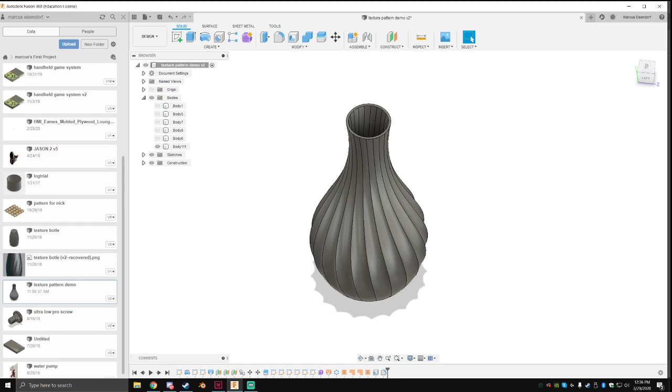Cool, so this is what we're making. It is a thing where you have... how do I explain that? You kind of have a solid surface that gets these cuts that transition into it. So we're going to be learning how to do that in Fusion 360. My voice is a little off because I'm still recovering from oral surgery, so I don't have full control over my mouth right now.

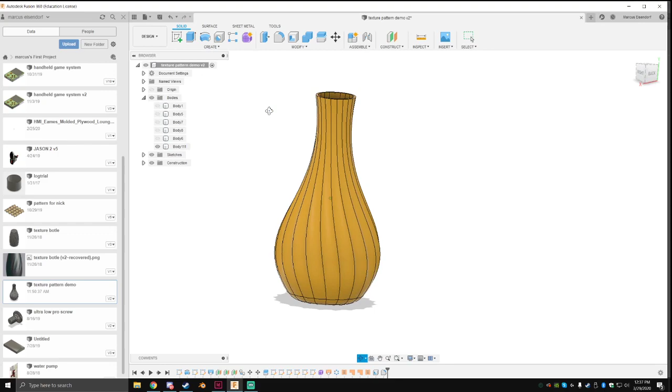Sorry, ladies. Let's start with a blank canvas. Okay.

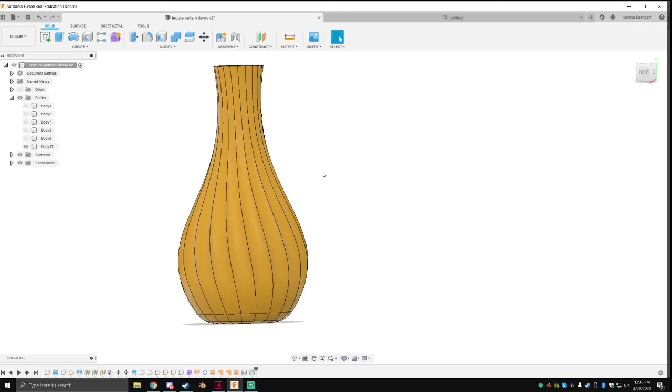Cool, so first thing I'm going to do is create the profile of the form. So you can see with this - often with 3D modeling, first thing you're going to do when creating a cylindrical form, if it's not just a straight cylinder, you're going to draw the profile out. So that's what we're going to do.

So I'm going to start with a sketch. When I start a sketch, I hit R or something to draw a rectangle, and I just select the plane and draw, then select my sketch tool. I'm going to grab my line tool and first draw the base of my form, then draw the center line of it and the top. It's important to draw the center line because that's how your form closes, and it's also the axis that you're going to revolve around.

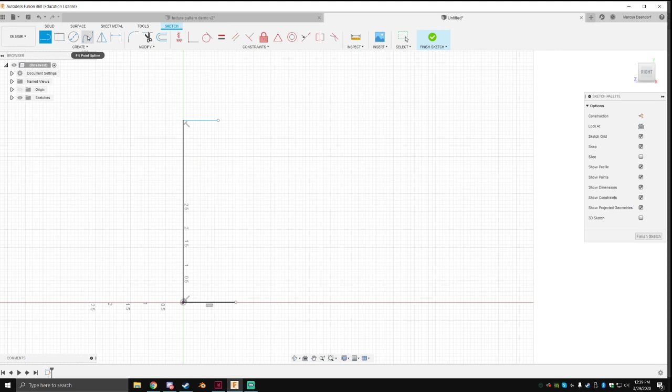Then I'm going to grab this tool up here, which is the fit point spline, to just draw out a nice kind of curved shape. And then you can go in and move these control points around until you create a form that you're happy with.

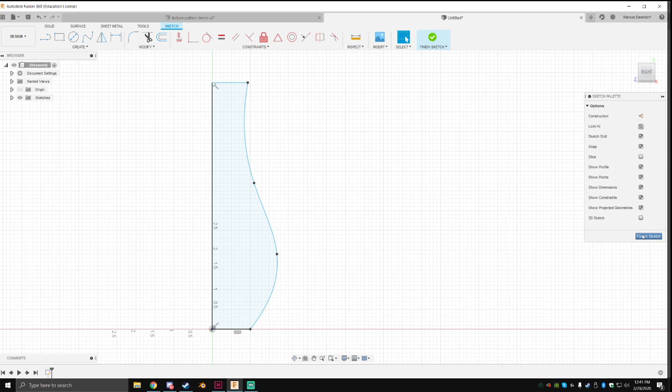Okay sure, I'll go all the way through it at a medium speed, and then we can go back through it and you guys can do it yourselves and ask questions along the way. I'm gonna keep going, so we're gonna finish the sketch on the right hand side there.

Okay cool, so now we have our profile, and I'm gonna use a revolve. Our profile is already selected - if it wasn't, you just select it. Then you select your axis, which is this form here. Creating a new body, 360 degrees, beautiful. So there we go, that is our form that we're going to be playing with.

And if you don't like the form, you can go back down here to your sketch, right click on it, and hit edit sketch. Then we can go back in and move it around a bit and try to create a form that you're happier with.

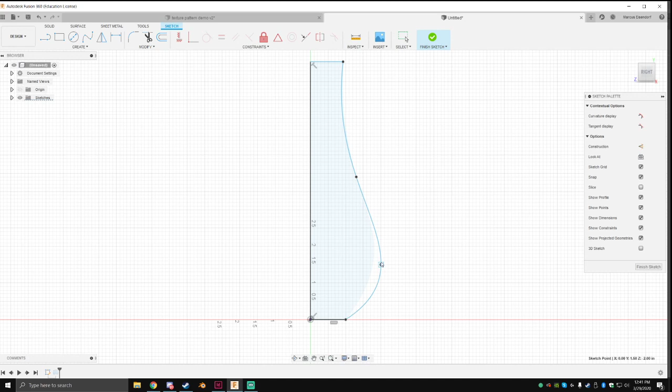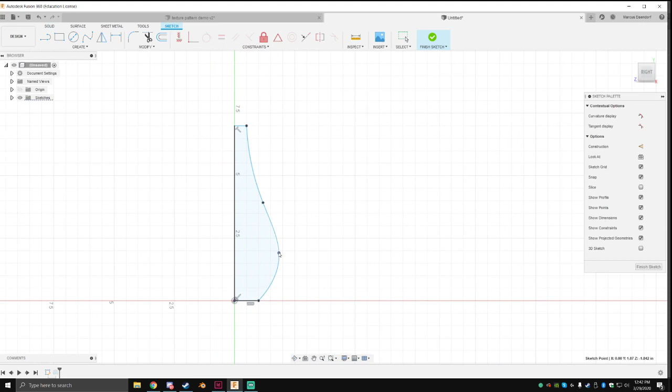That looks alright - actually it looks pretty ugly, I think it needs to be slimmed out a bit. I'm gonna bring this in, something like that, that's a little nicer. Something about the base isn't quite right - if we do like that, screw it, we're not here to make beautiful forms, we're here to learn technique. So that's exactly what we're gonna do.

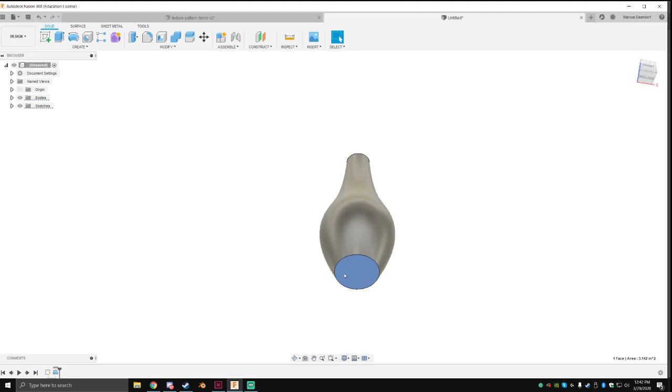So the first thing to do in order to get our sections, that curve - and I'm sure there's plenty of ways to do it, but this is what I figured out - I selected the bottom face here, and I hit C to draw a circle. Now I select that center point, and I make my circle larger than the largest part of my form. There's no specific math here, it's just larger than.

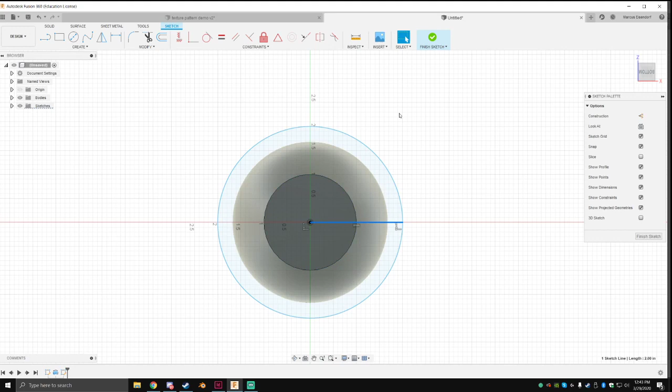Then what I'm gonna do is draw a line - I hit L to grab my line tool, and I'm drawing it from the center to the edge. Now I hit escape to get rid of the tool. I'm gonna select my line here and go up to create circular pattern. With my line selected, I select the center point here as my center point. Now you can see that we have a pattern happening - you can move this around to increase it. The type is full, which means it'll divide however many pieces you want evenly.

And I'm going to do 20. Okay? So what this is defining right now is the thickness of those sections, how thick each of these sections is. So I'm going to finish the sketch.

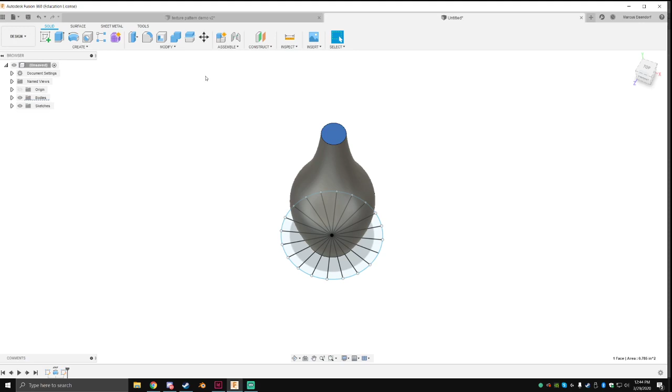And there we go. All right. What we're going to do now is select the top plane, and I'm going to hit P for project. All of these shortcuts you can also just find them in here somewhere. I don't know, project is somewhere in there. I hit P for project.

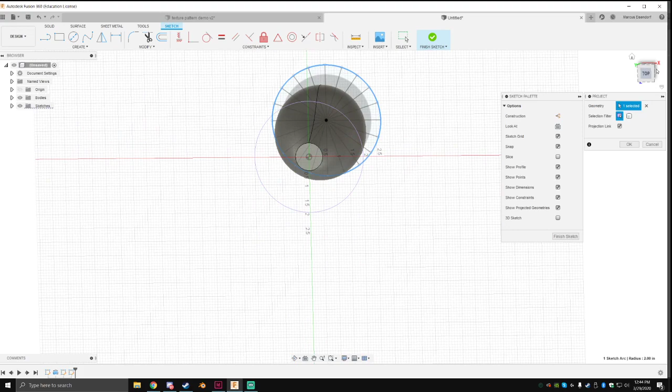And I'm going to project the circle, which means I'm going to take the circle from the bottom and project it, meaning create a copy of it at the new plane I'm working on. I'm also going to grab a couple of these lines and project them as well, doing a few so we have some options, because what I'm about to do next you'll understand. So here we go, we have the thing at the bottom, the thing at the top, fully enclosing our form here.

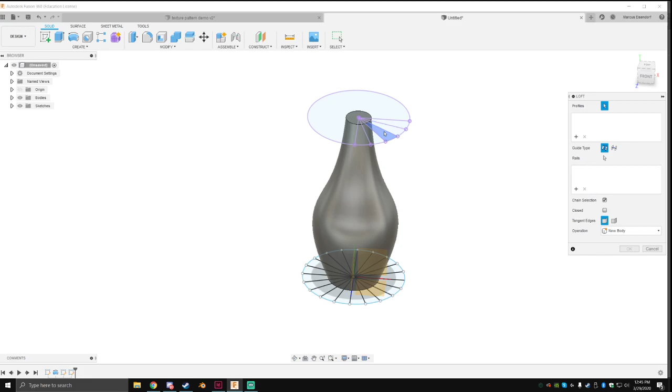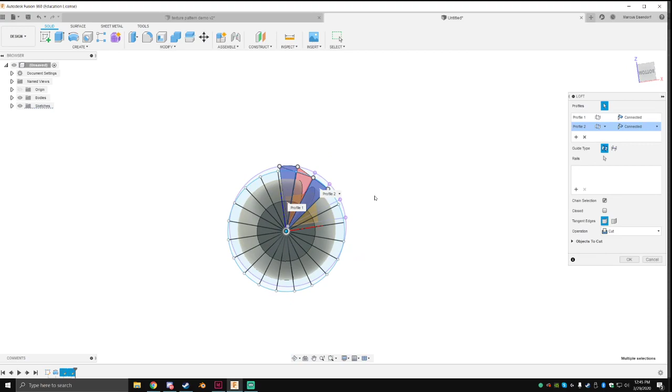And we're going to create a loft. What the loft will do is we select a section, one of these little pie slices from the top, making sure you select not just the outer portion of it but the inner portion as well. Then we select a pie slice from the bottom, and not the one directly under it unless you want a straight kind of sweep, but one of the ones off to the side. What you'll see is we now have this cut that kind of arcs through our form. So we hit OK.

You can see what that did. Okay? And this is the basis of the whole operation.

All right. Any questions so far? You guys doing good? All right.

So over on our left-hand side here, I'm going to open up our bodies panel. We have our body one, and we're gonna make— Tag, you have a question?

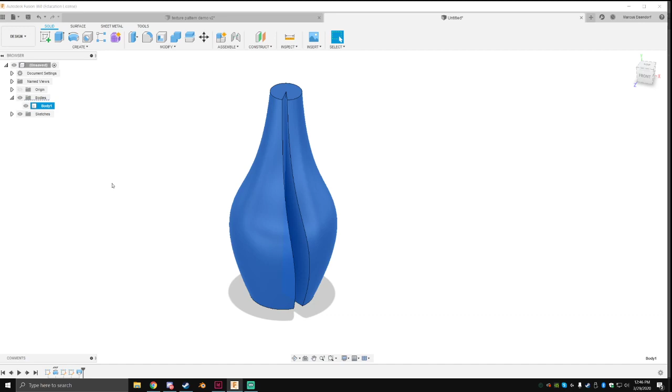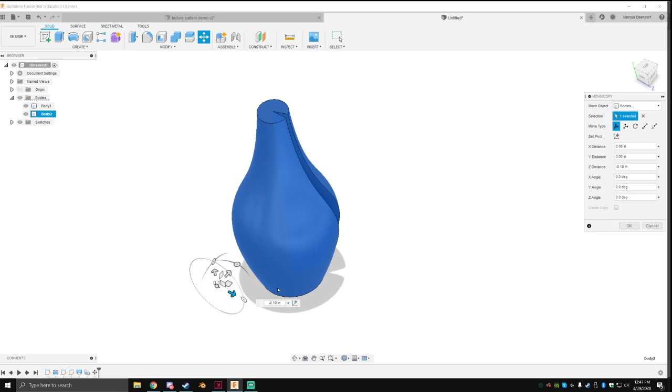Okay. We're going to make a copy of this. It's very important that we have a copy of it. So I'm going to hit M for move and copy, hit create copy. This is probably the most terrible way to make a copy of something, but you have to move it for it to create a copy, so I move it a little bit and then move it back. All right, so now we have two of the same exact thing here.

We have two because one of them we're going to cut up. So I'm going to hide the first one here. Okay, so now we're just working with this one body, and we're going to start cutting it up. We'll do that using planes, offset planes.

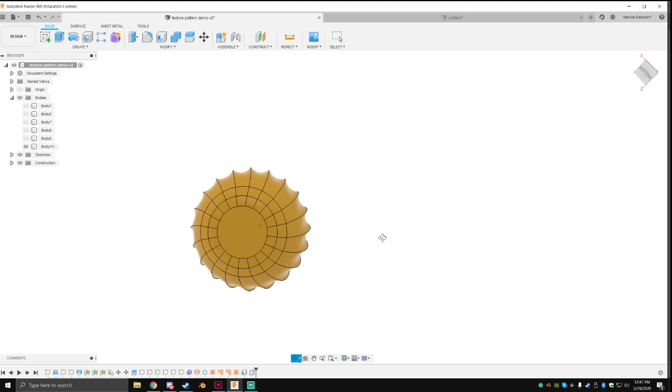So up here under construct, we're going to hit offset plane. First we're going to select the bottom of our piece. This first plane is going to define where we want these to stop, where we want to stop doing indenting and go back to being a straight circle. Okay, so, or where it starts, whatever.

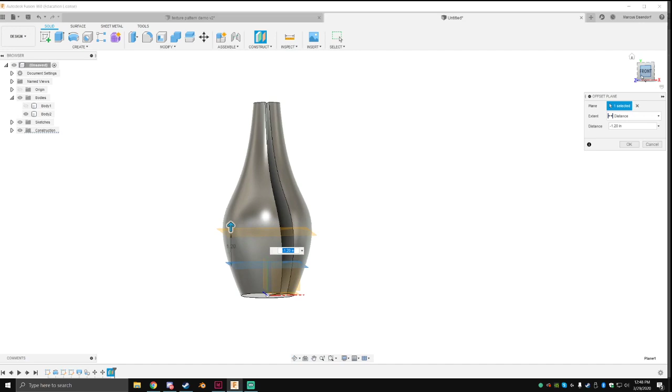I'm going to create another offset plane from this one, and this is what I like to consider the major indent, like where we want the most indented portion to be. On this one, I have that right in the middle of the bulge, where it's the most indented. So that's where this is, kind of right in the middle of the bulge.

We're going to create another plane, and this one's going to define where we want the texturing to stop. Okay, so now we have our three planes, and these define basically the entire area that our texture is going to live in. So now we're going to use these planes to cut our body.

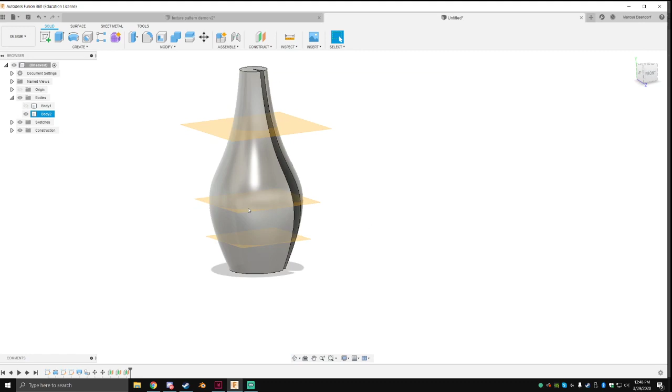We're going to do that by going up into modify, split body, and we select first our body split, which is this. Our splitting tools are our three planes, so 1, 2, 3.

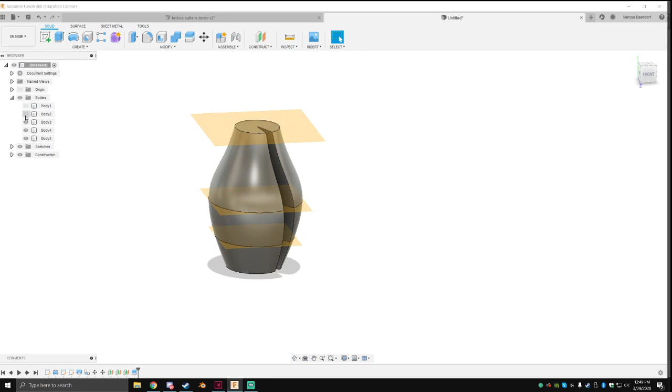Great. So now our body has been split into multiple sections, and I like to just organize these so that they're in order. So there's 1, there's 2, so we're going to drag this up so that we have boom, boom, 3, 4, beautiful, and then our whole body section there.

And I'm going to hide all of our construction lines because we don't really need those anymore. Okay, so now here's our split body.

Okay, everybody following along so far?

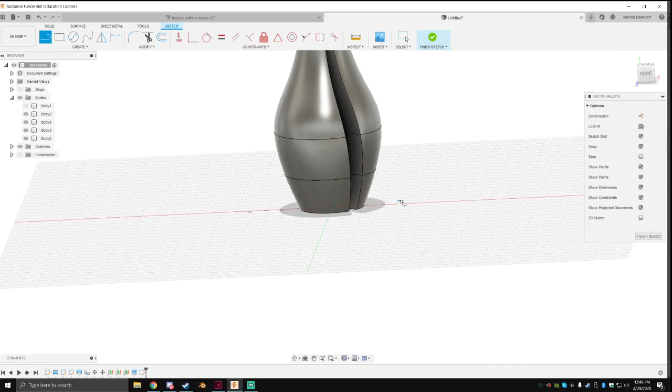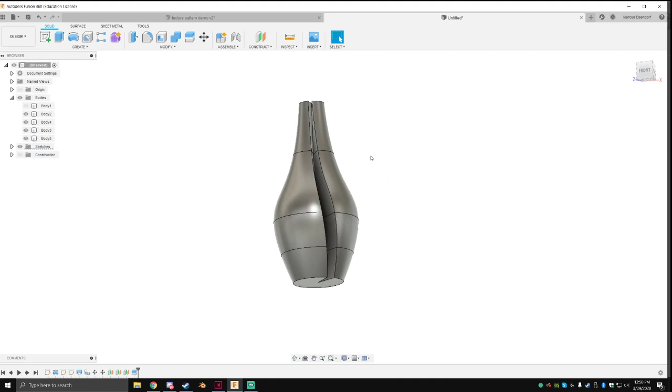So now what we have to do is within these cut sections, we're going to define what the profile of our pattern is going to look like. You can do anything for this profile. We're doing just a simple indent for the demo, but you can do whatever you want at home with your computer. So first we're going to start at the bottom. I hid all these other ones so it's easier to see what I'm working on.

I'm going to hit C to draw a circle, and I'm going to draw a construction circle. I check construction over there from the center point to the edge, and it just locks right on. Okay, so now we have a circle there.

At the bottom, it is a circle. There's no indenting at the bottom because the idea is that it transitions. So we're actually going to make that not a construction circle. What I'm going to do is just draw some lines to basically define this pie shape. I'm going to turn off construction. One line there, one line there. Our shape is defined.

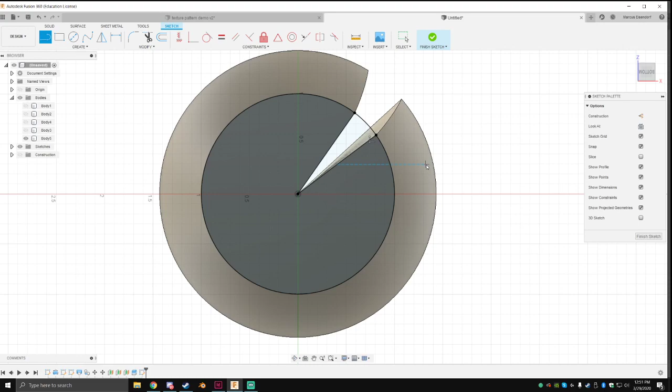I'm going to hit T to open up my trimming tool. I'm just going to trim away all that extra stuff that we don't need. Okay, so now you can see that we have our first little pie shape defined.

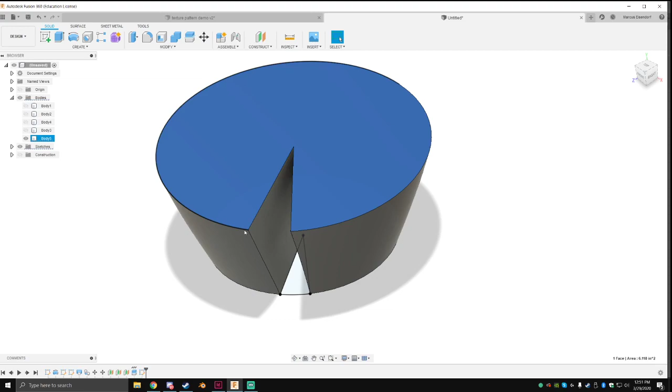We're going to do the exact same thing here, because as part of our transition, we want it to go back to being just a normal cylinder at the bottom. So I'm going to hit C to draw my circle, lock it onto the corner there, hit L to grab my line tool, and just define, again, my pie shape.

Hit T, okay, it's acting weird. I think that's fine. Actually, it's not fine. We are going to delete that because it's acting weird. Instead, we're going to just use a center point arc. We start with the center point arc at the center, and then we go corner to corner. Now we have a nice defined pie shape.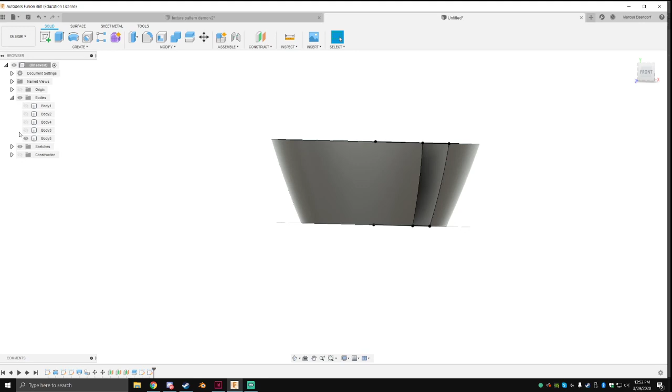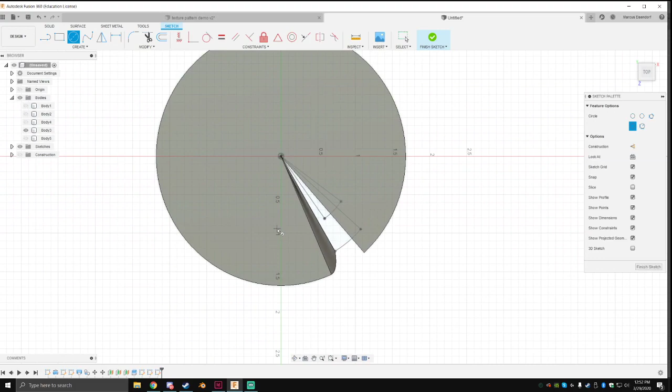Great. Let's do the next section, which is this part here. This is where our form starts to take shape, so it's going to be a little bit different. I'm going to go into sketching mode. Because I want a symmetrical indent, the way I'm going to do that is I draw with construction lines. I hit L for line tool, and then I check construction. You can also hit X to open up construction mode.

I'm going to draw a line from this corner to this corner. Then I'm going to draw a line from the center through the midpoint, and it will just lock onto there for you. If it doesn't lock on, which it will, you can always use relations. So if you select first your center line here and then the crossbeam, you can just hit perpendicular, and it will throw it right there in the center for you.

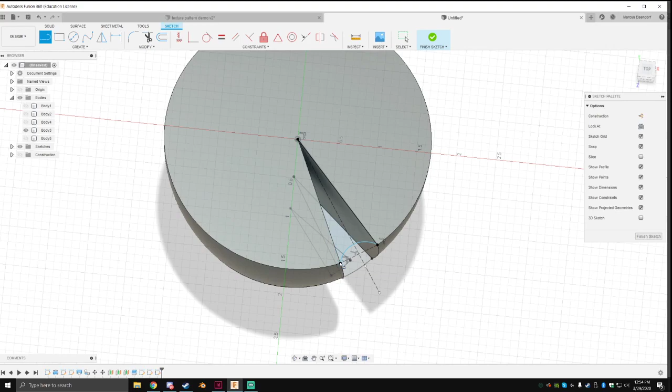So now that we have that center line defined, we're going to draw an arc. I'm going to use a 3-point arc. A 3-point arc works by selecting first one corner, then the other corner, and then you get to define where it goes. I'm just going to turn off construction, and basically create as much of an indent as I want to see there. Then I'm going to finish it off with some lines to define our pie shape—it's actually unnecessary, I just like to do it. There we go. So now we have our 3 shapes right here that are transitioning from cylindrical to indented.

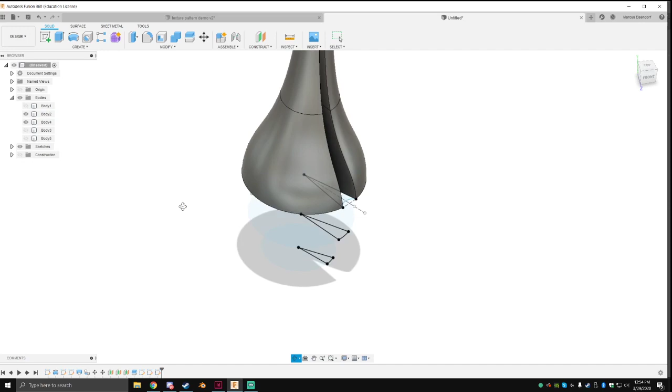So let's open up our next body. Now, in this upper section here is where we want it to go from being indented to being cylindrical again. We're going to grab our shape here and do the same thing that we did on the other ones, which is start by drawing our lines to define our pie shape. Then I'm going to go and create a center point arc, selecting the middle, and then our 2 sections there. Beautiful.

Finish sketch. Okay, and then we have our final shape here at the top. I'm going to draw a circle, and then I'm going to draw our lines, 1, 2, and I'm going to trim away the rest of the circle. Great.

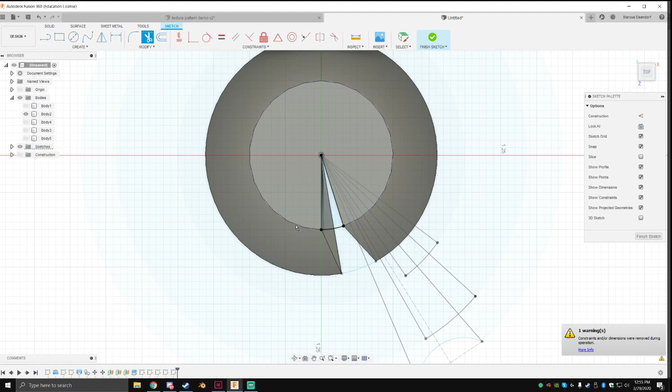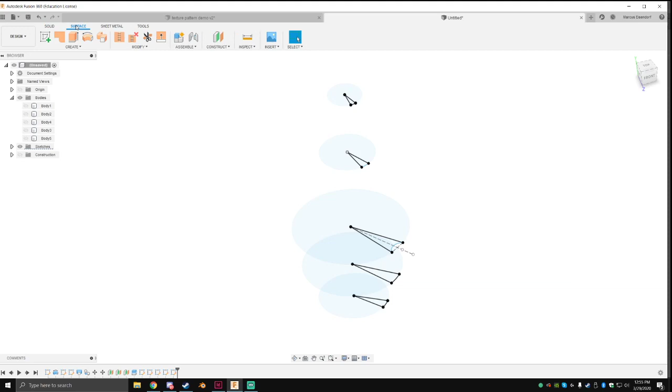So now you have the basis for what we're going to do. This is where it gets fun. What we're going to do is go up here on the top to surface mode. I'm going to create a loft. We're going to loft from all of our little sections here.

Now we have a surface that is one little quadrant of the form that we initially created. But there's one more step, and you'll see if we open up our whole body that the form doesn't quite align to the edges. Things are a little off.

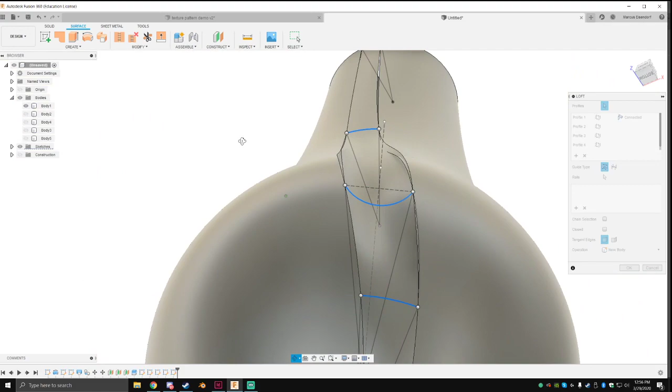See that? To fix that, we're going to add rails, and that's what this body is for. We're going to select one rail on this edge and a rail on this edge. Now our surface perfectly fits in that 1/20th section of our whole cylinder. So we hit OK to create that new body.

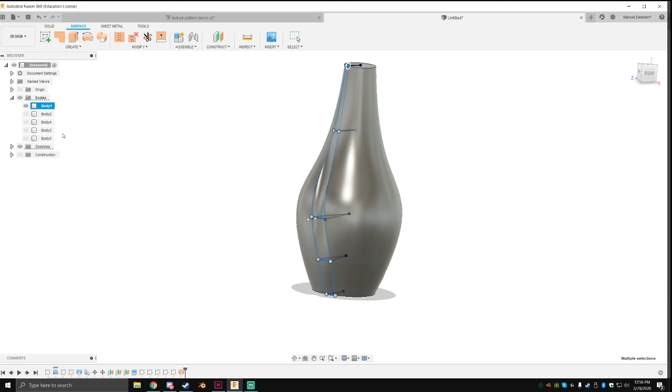And now we have a surface body. We can hide this, and there is our surface.

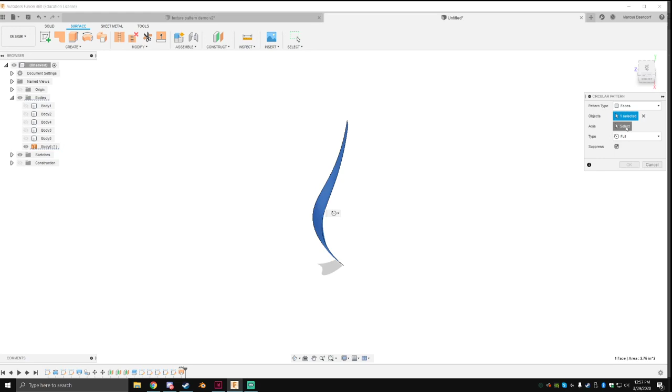So now, to turn this into the whole thing, all we have to do is go into Create, Pattern, Circular Pattern, and select our objects. Then in Axis, we select our center axis. Remember that we cut it up into 20 pieces, so we're going to put in 20 and hit OK. And there you have it.

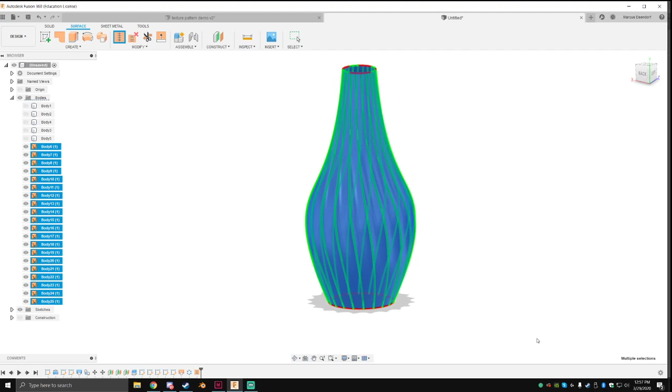That is pretty much it, but let's wrap it all up, because right now we have 20 different surface bodies. So we're going to go into Stitch and select the whole thing. You can see these green lines are saying that all of those edges can be stitched together. It's red around the bottom and top because it can't stitch that whole circle together, but we'll do that. Hit OK. Now you'll see that all those 20 bodies turned into one surface.

And then we're going to go into Patch. We're going to patch the bottom. Beautiful. And we're going to patch the top. So now you'll see that we have these three surfaces: the body, the bottom, and the top.

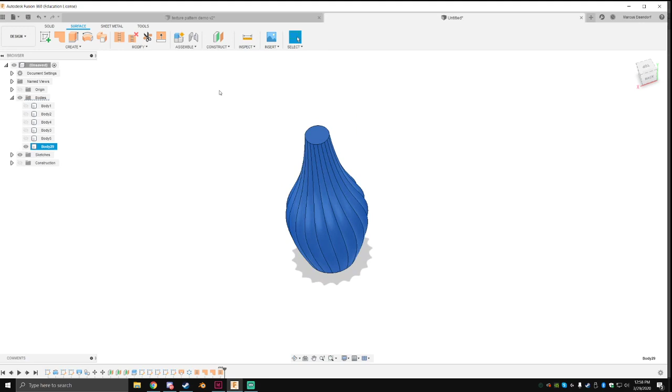And you go stitch one more time and stitch the whole thing together. When you stitch a closed shape together, you create a solid body. You can see if we go into Inspect and Section Analysis that it's all full, a whole solid form, which is exactly what we want.

Now I'll go back into solid mode. This is where you get to do whatever you want with your body now. So if you want, you can hit F to grab your fillet tool, or just select it up there. You can select the bottom face, add a fillet to it.

Things take longer now to load because this is kind of an intense form. So you can fillet up the base and the top, whatever you want.

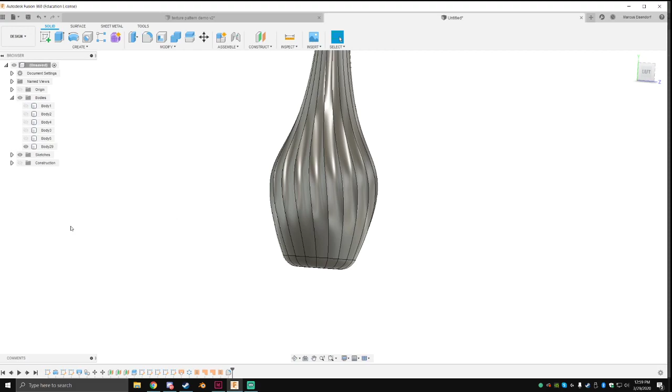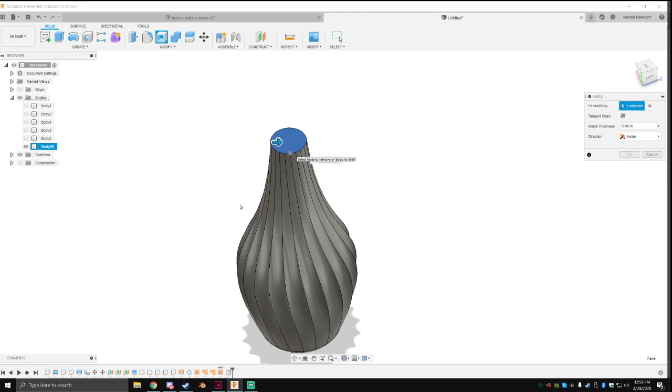And now we can go over here. You can go into Modify, Shell, or it's just right here. And you select that base, 0.01. It just needs to load for a second. Let's see what it comes up with. There you go. Now you have a shelled body.

It's a little bit thin. Let's go 0.05. Let it load. Beautiful.

All right, so that's pretty much it. Very quick and easy, once you know how to do it.

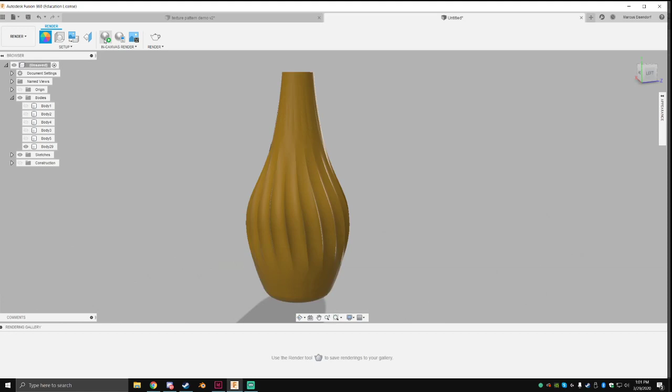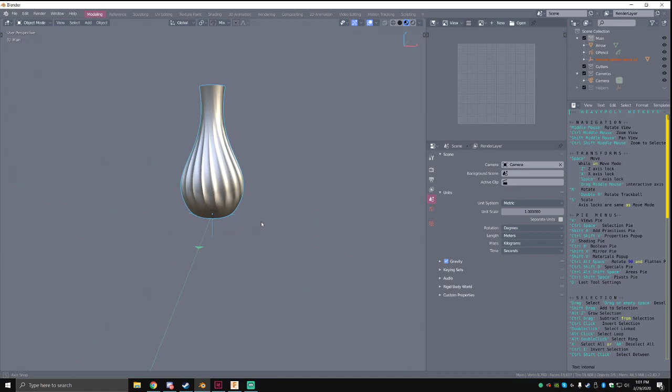Okay, and this is one I made earlier. It's not the one that we just did, but that's neither here nor there.

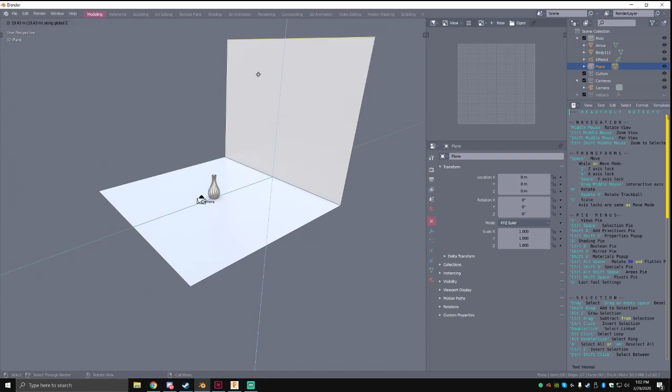So I'm going to create a plane, because I'm going to create a seamless backdrop for our file here. I'm going to grab our edge here, and I'm going to go quick in here because there's a lot to learn in Blender, and I'm not going to be able to teach it to you in a few minutes. Shade that smooth, shade that smooth.

Okay, we're going to create a new camera and set up a shot, and I'm going to change our distance to 90. Great. I'm going to adjust our material here. Okay. And we're going to lock down our camera. Great, so we have our seamless, our camera.

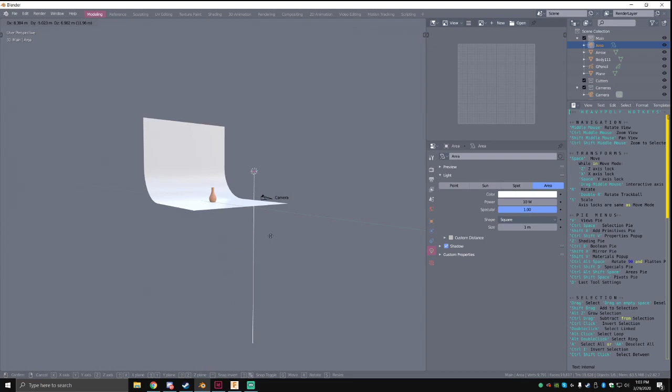Let's get some lighting set up. I'm just going to do a simple light setup, something to maybe mimic having an open, like a large window off to the side, just to get some nice kind of soft lighting from a big window. We're going to go to rendered mode. Let's up this to 2000. Okay, soft shadows. Beautiful. Let's add a material to our backdrop.

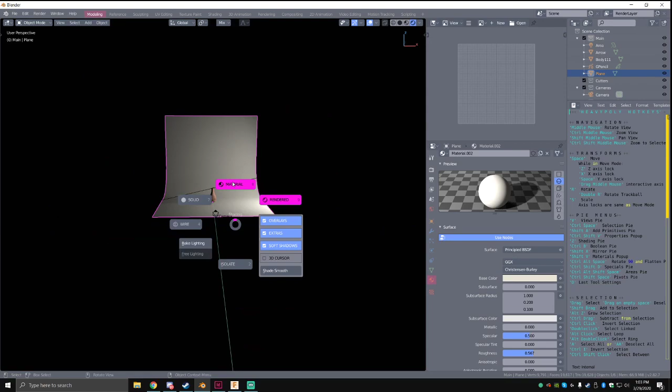Let's make it nice and soft, I like soft. Maybe it's like a kind of ivory paper going on. And maybe we want a light adding some, just some highlights on the edge of our body here, so you get some edge lighting, rim lighting.

Let's see, something like that, just so you light up some of those edges. Cycles, let's see how this looks. Yeah, we have something going on here.

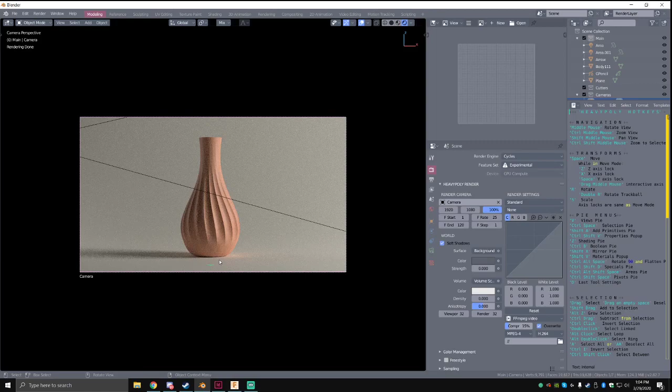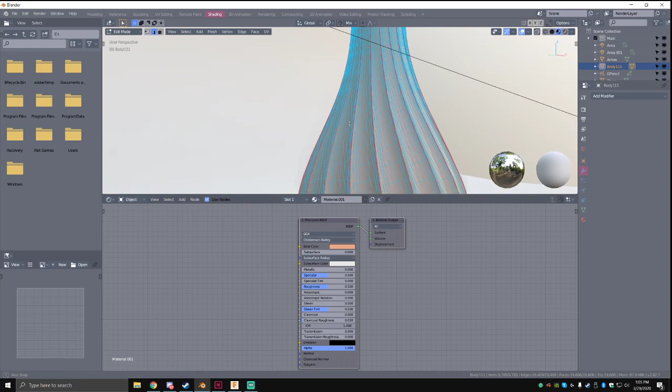Now, one thing about bringing meshes from Fusion into Blender is that you're switching. They import kind of weird because Blender is mesh modeling, so you can't really do as much with the mesh as you'd maybe like to. When it comes to texturing, you can even see the model's a little weird. If we open up what this mesh looks like, it's a little messy. You would never model like this in Blender. But that's all right.

So one thing we're going to do is try and add some texture to it. Maybe give it some sort of a powder coated look. That's kind of cool. Not what we're doing, but it's kind of cool.

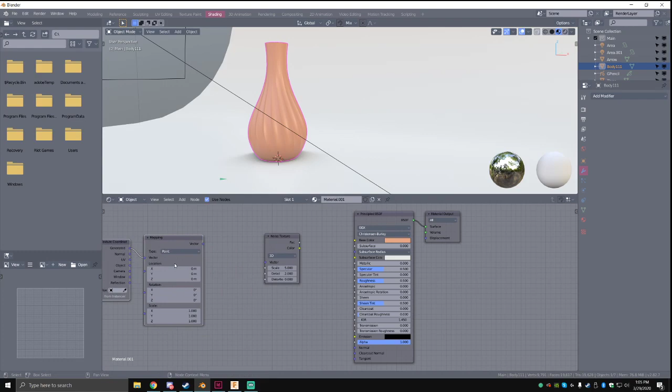So we're going to add a noise texture. Let's see what that'll do. Beautiful, scale that so it's really fine. What I'm going to use the noise texture for is creating that kind of bumpy look of powder coated.

So I'm going to use a color ramp. Can you smooth the mesh in 360?

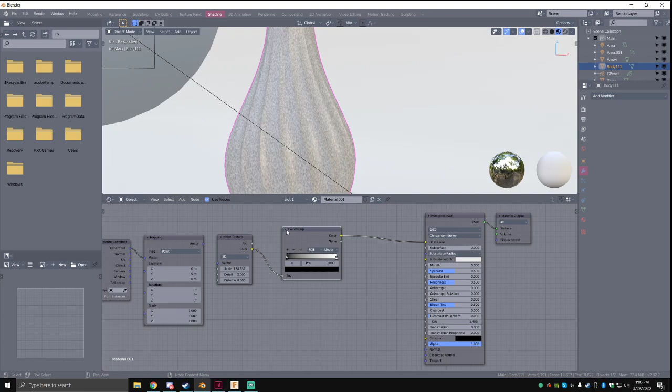Not really. It really sucks bringing stuff from Fusion into Blender, and that's just a fact. Really, you can go from Fusion to KeyShot, or just model straight in Blender, is really the best way to do things, if you want my opinion.

So I'm using this color ramp to switch it to just black and white. Let's up that grain some. Okay, I'm putting it into the base color just so I can see what's happening, it's easier to edit. But really we're going to turn this into some surface imperfection.

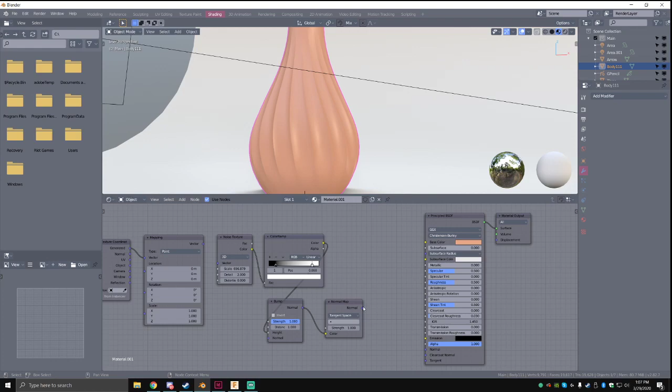Great, so now I'm going to add, what do we want to do? Let's bring in a normal map and a bump. Take that out of our color. I'm going to go into the height here and bring that normal into the color there, bring that into our normal. Let's see if that does what we want to do. Sick.

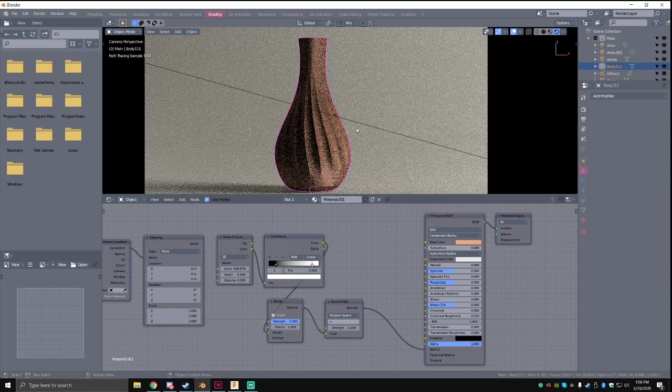Don't you love when stuff works? But it's still looking maybe a little bit too intense. Let's look at our camera, rendered. Yeah, it's looking a little whack, not gonna lie.

So I think our bump is probably a little bit too high, so let's just tone that down some. Oh yeah, we are in business. I think we got something.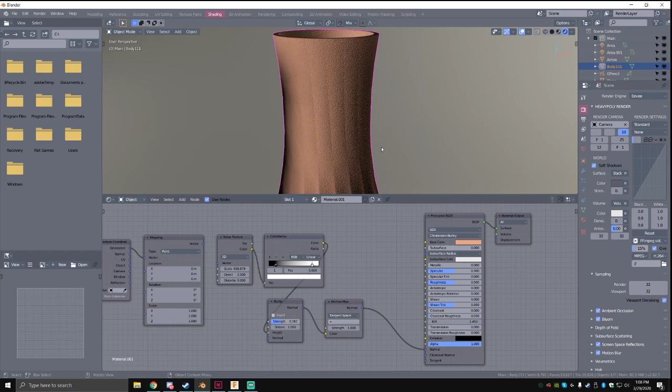I wonder if they'll let us clean that edge up. No, I don't think so. Oh well. Okay, cool.

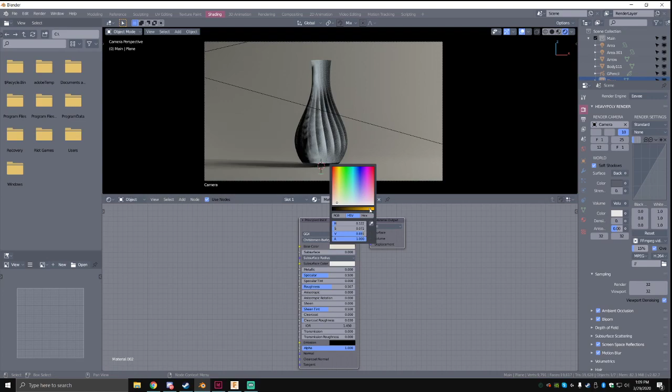So then what I'll do is, what color do we want it? I kind of like maybe a light blue. Let's go a little bit more saturation. Okay, snap into our lamp. Nope, that looks good. Cycles, cool.

Render, turn that up to maybe 64 samples. And let's see. Here's, yeah, I can do maybe 75%, maybe we'll do 50%, just so you guys can see some output here. And sorry, I'm just clicking around right now, I'm not telling you guys what's going on, I'm just getting a render set up.

256, 256, okay. So now I'm gonna go render this image out, let's see what we get.

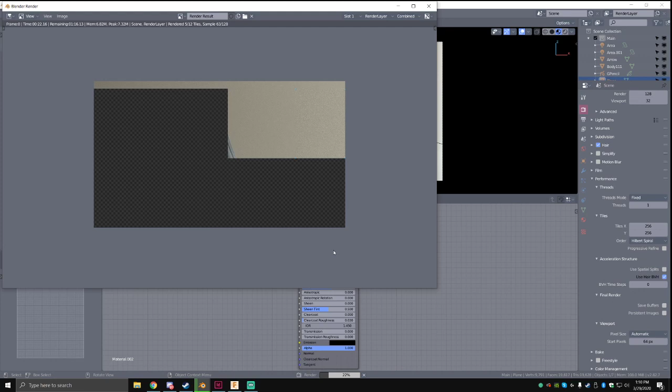Is there a fillet edge cheat for import geometry like in KeyShot or nah? Yes and no, with weird imported geometry it's not great. I'm not really the guy to ask about that, unfortunately, I'm sorry.

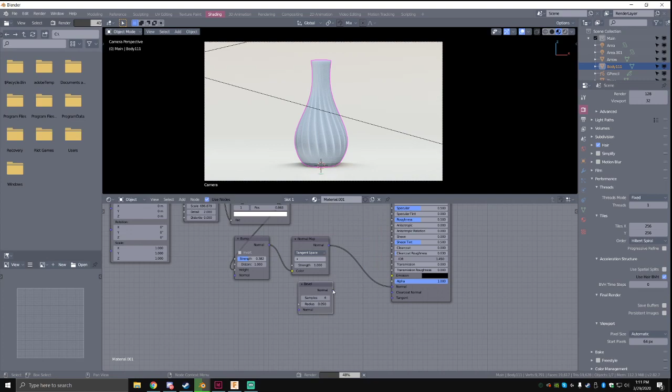I know there's some good ways to do it. Like in the material, you can add a bevel, and you can put that bevel into the normal, and it's supposed to do something. I don't really know how it works.

You can see there's some weird shit going on, but sometimes you get weird shit, and that kind of has to do with the mesh being whack. Maybe we can clean it up a little bit, let's see.

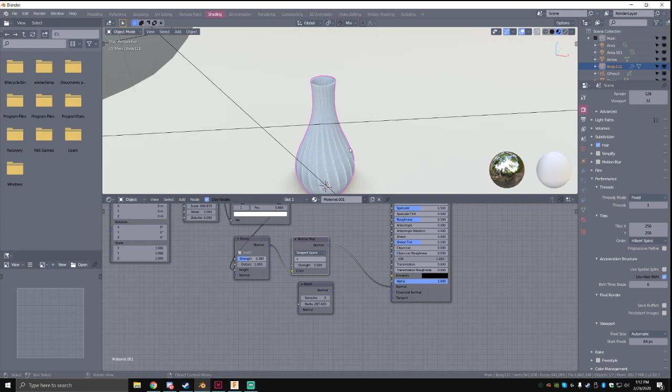Hopes are low, boys. But spirits are super high. Super high spirits.

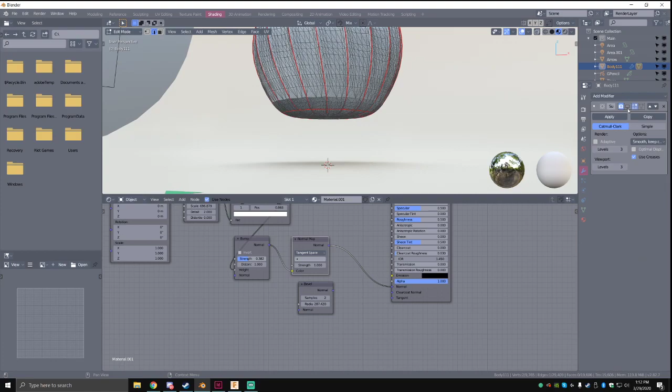Yeah, you can see this mesh is really crappy. Anyways, this wasn't supposed to be a Blender demo. If you're doing this in Blender, you can see that you can create a nice clean mesh that doesn't have all the crap in it.

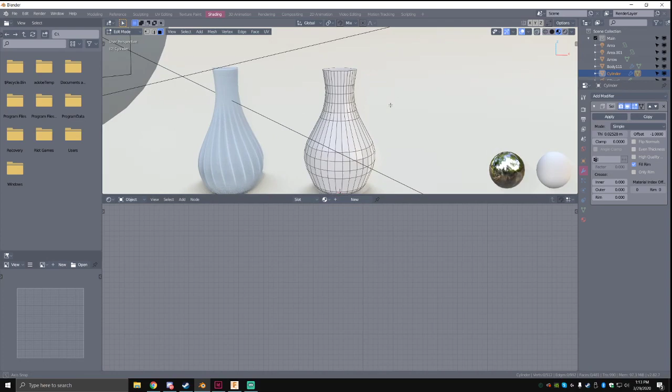And we can take this material, drop it on there. Ooh, yeah.

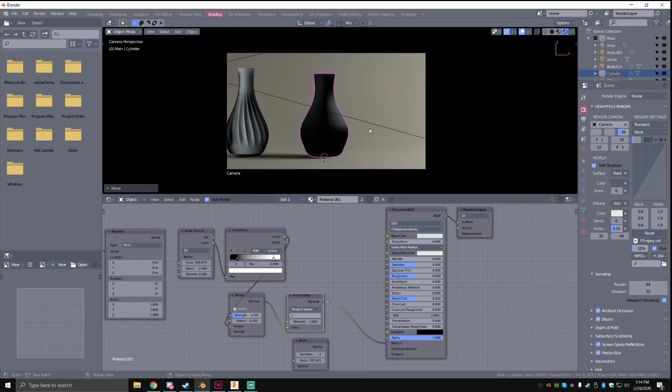Any other questions? You're all just going hard, making things. I hope so.

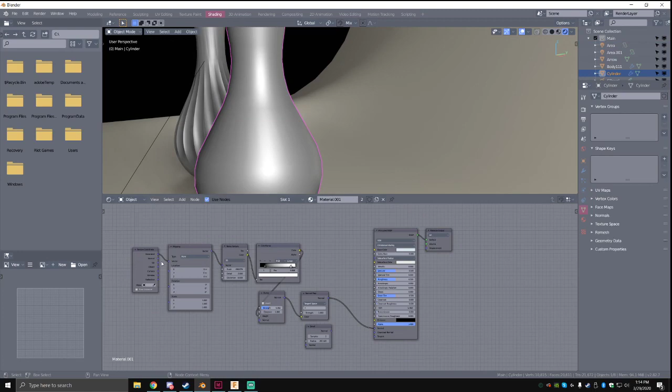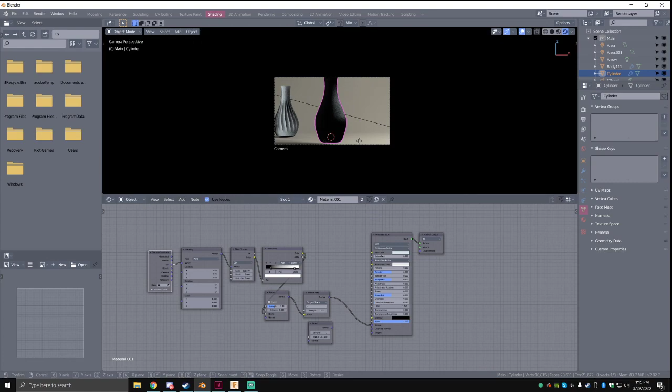Yeah, man, no problem. Sure, you're welcome.